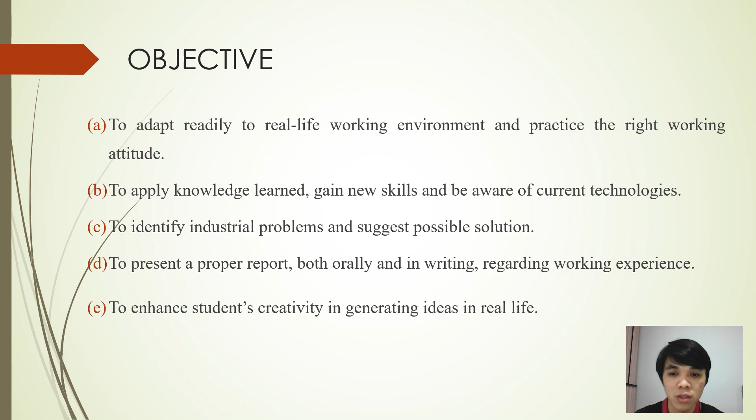For objectives: first, to adapt readily to real-life working environment and practice the right working attitude. Second, to apply knowledge learned, gain new skills, and be aware of current technologies. Third, to identify industrial problems and suggest possible solutions. Fourth, to present a proper report, both orally and in writing, regarding working experience. Last is to enhance students' creativity in generating ideas in real life.

Next is about company background. MUEHLBAUER is located at number 3 Jalan TU 62, 75450, Ayer Keroh, Melaka. MUEHLBAUER group has developed into a proven technology partner in the areas of smart cards, e-passport, RFID smart labels, and flexible solar cells. Other business areas include the sorting of microchips, carrier tape systems, as well as automation.

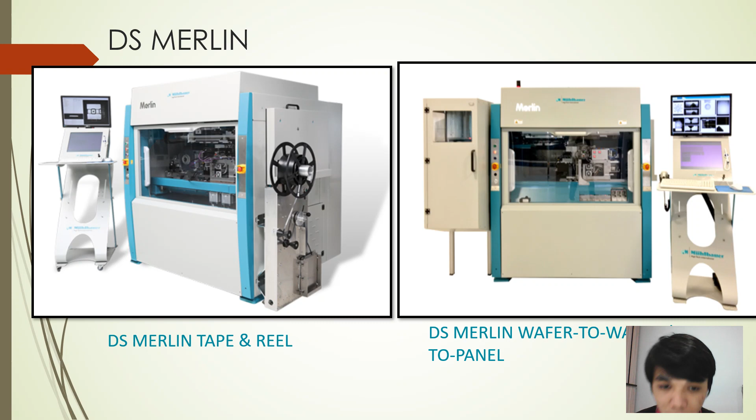Here is an example of the DS Merlin machine. We have DS Merlin tape and reel, and DS Merlin wafer-to-wafer, and wafer-to-panel.

Now, die sorting. What is die sorting? First, let me explain about die. A die, in the context of integrated circuits, is a small block of semiconducting material on which a given functional circuit is fabricated. Die sorting is used in the IC packaging manufacturing process. A die sorting system picks up a die or package from a carrier, inspects it, and determines whether it passes or fails at high speeds.

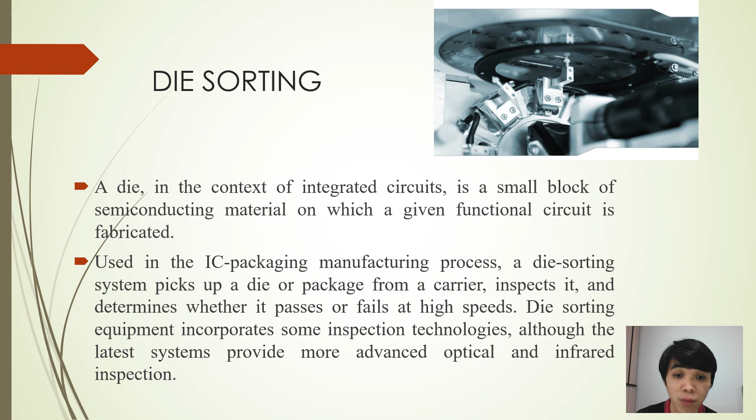Die sorting equipment incorporates some inspection technologies, although the latest systems provide more advanced optical and infrared inspection.

Here is where I was placed in MUEHLBAUER Technologies. I was in pre-assembly. I have experience in two departments, which is the electrical department and mechanical department. Here are the things I learned from these two departments.

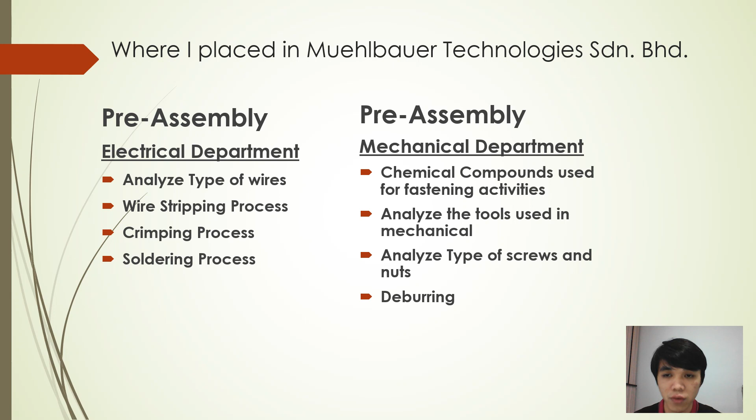First, about the electrical department. I can analyze the types of wire. There are a few types of wire that I used during my internship in the electrical department. The range of cable is from single core up to 27 cores. Below are the cables that I used during the internship.

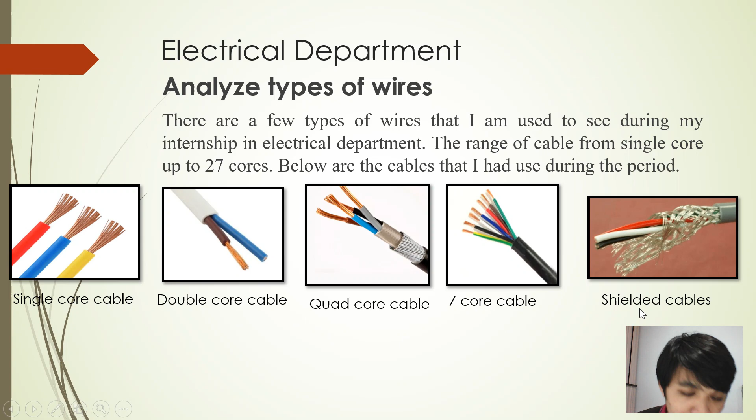First we can see here single core, double core, quad core - quad core is four cores in a cable - and also 7 core. This is the cable I normally use in the electrical department. The last is shielded cable. The shield is to protect the cables, basically.

Next is wire stripping. For the cables of each set, they will be stripped according to the specific length required. This is to make sure that the wires exposed from their PVC coating are uniform in length. For each cable, we use the same general length of 4.5 cm. Below are the steps.

Strip the cable using an automatic cable stripper or using a knife. Strip the inner core wires using a wire stripper. Adjust the teeth of the stripper to 10 mm. This is the example if we want to do the crimping process after that.

So we have to strip the wire into 10 mm. After that, we have to fold the exposed copper wire neatly in half evenly for the crimping process. These two tools are normally used in wire stripping.

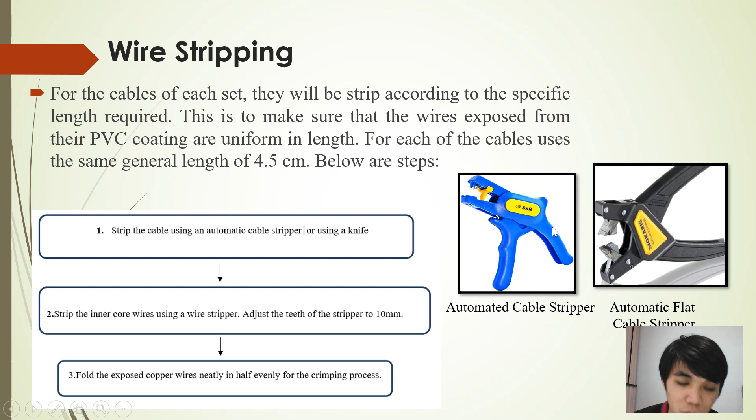Next is about the crimping process. First is about sub-crimping. For this sub-crimping process, we will need to crimp the cables that have been stripped with the crimping tools.

Crimping pins will be used to crimp the copper wires. The step is simply to put the folded copper wire into the pin and crimp it using this crimping tool. Here is the male crimping pin, and this is an example of the crimping tool.

Normally the copper will be placed in here and we use the crimping tool to crimp the copper. It will hold the copper wires in place.

Here is an example of this sub-connector. We will insert the pin into this sub-connector according to the circuit diagram, and it will have a label on the connector.

Next is the crimping process for ferrule crimping. For this process, we need to crimp the wires that have already been stripped, using the crimping tools. The ferrule will be used to crimp the copper wires. By adding a ferrule to a wire termination, you are essentially giving a stranded conductor, enabling a more reliable electrical connection.

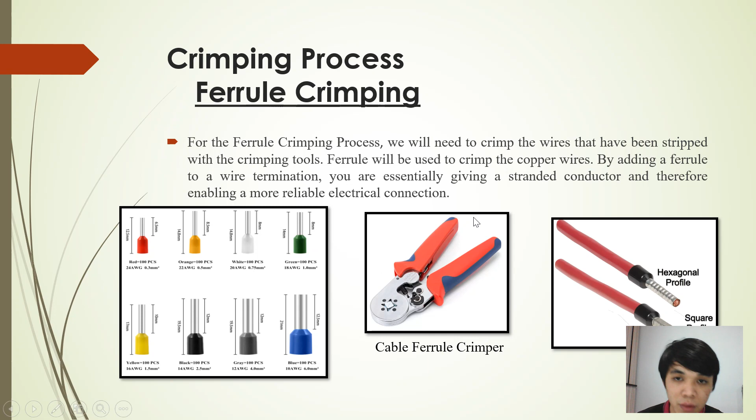Next is the soldering process. Soldering is a joining process used to join different types of metal together by melting the solder. Solder is a metal alloy usually made of tin and lead, which is melted using a hot iron. By applying soldering flux, the soldering job becomes nicer and easier.

When soldering the cable with components, cover the soldering part with heat shrink tube and heat the tube with a blower. Here is an example of the soldering gun, soldering tin, and lead.

This is a smoke absorber. It's really important because it absorbs all the poisonous smoke and protects us, so it's a must when we do the soldering process.

Here is an example of soldering flux and heat shrink tube. The heat shrink tube comes in a lot of sizes, depending on whether you want to insert a single cable or multiple cables. For example, 2mm is for a single cable, while 4 or 5mm is for 2 to 3 or 4 cables, like that.

And last, this is the heat gun blower.

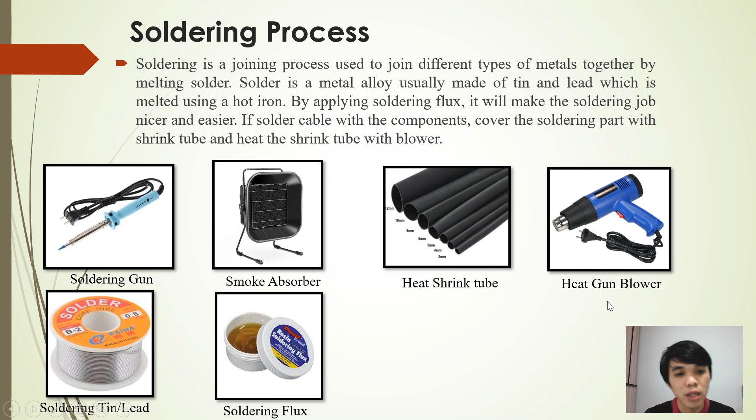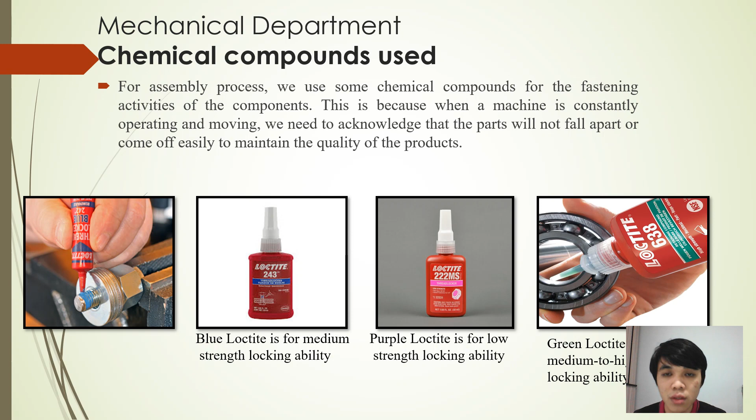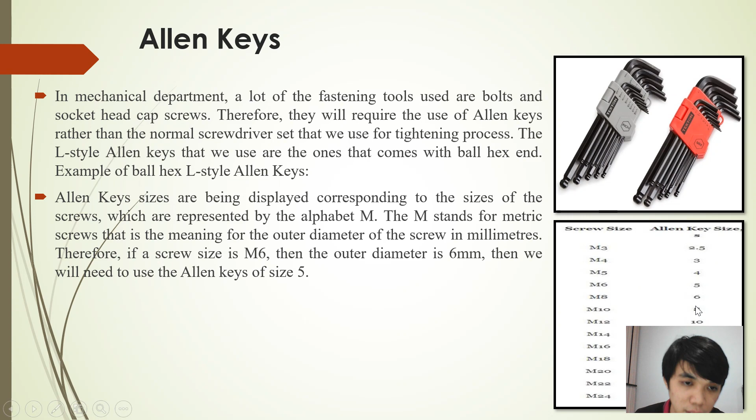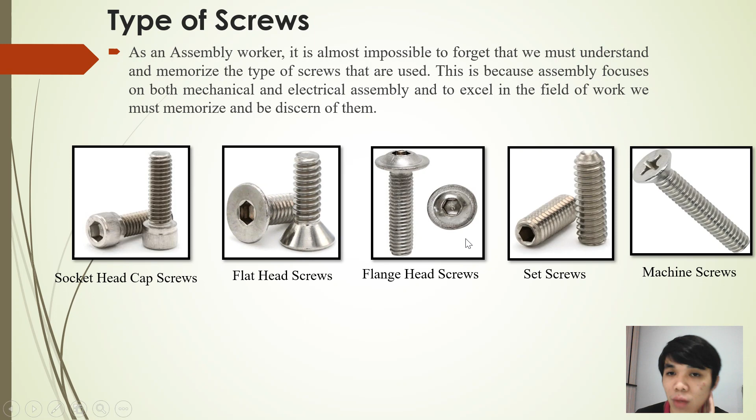Here is the first one that we normally use, the socket head cap screw. A socket head cap screw is a socket cylinder with a head with a hexagon socket. Second is flat head screw. We also have flange head screw, set screw, and lastly machine screw. These are the screws that I normally use when doing assembly work.

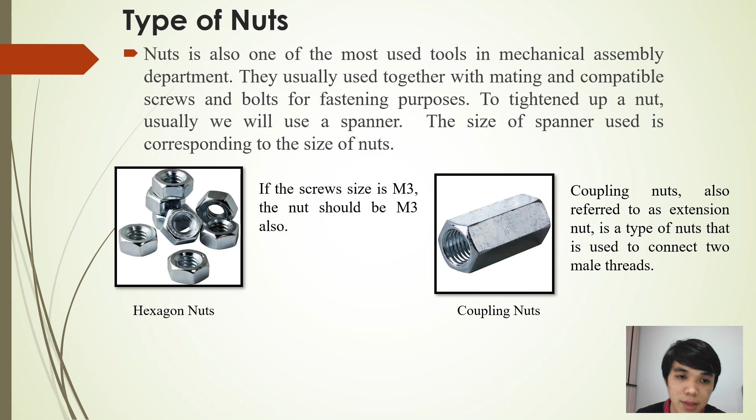And the second is coupling nuts. Coupling nuts, also referred to as extension nuts, are a type of nut used to connect two male threads, meaning to connect two screws.

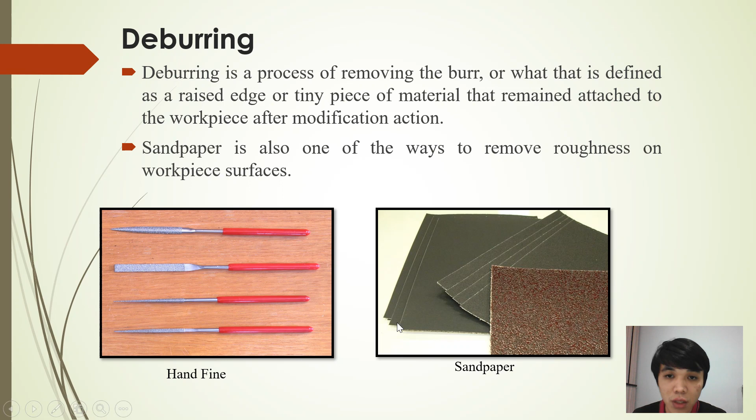Okay, next is conclusion. From this internship, I have learned how to identify screws and nuts, because there are few types of screws and nuts. So in the assembly department, I now know which type of screw and nut we are supposed to use.

Okay, I have mastered the skills of crimping wires, because in the electrical department we normally have a lot of modules that need the crimping process. So I can handle it and master the skills.

I have also learned how to apply the knowledge of soldering into real life application. Like I said just now, in the electrical department there are a lot of modules that need soldering, crimping, and things like that. So I have to master it, to make the job easier and nicer.

So the fourth point is I have learned the proper way to use the tools used in the assembly department. As I gave many examples just now, there are many tools we have to use in the assembly department, so I have learned how to use them properly. Yeah, I can understand, like with the Allen key, if the screw is M5, I have to use Allen key size 4. This is just an example.